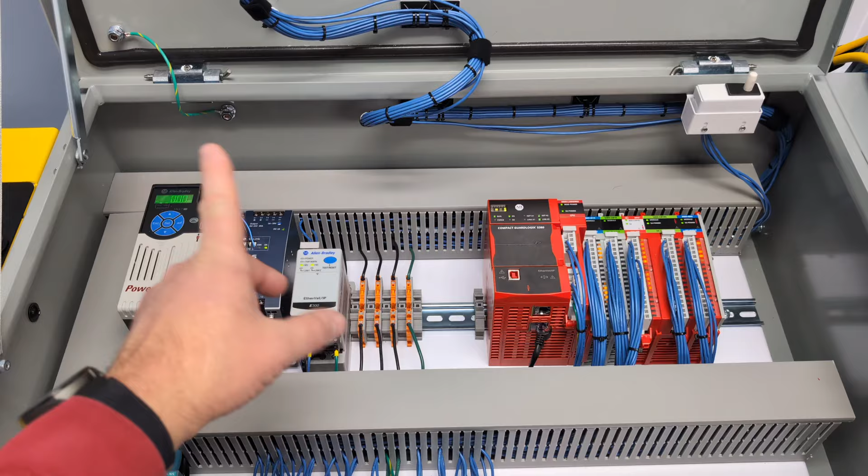So over on the Rogue rig, we've got it built out where the basic breaks work. The old one had 187 combinations that we consider common machine breaks. This one, we're up to about 60, and it should surpass it in the end.

What I want to do today is build out what diagnostics capabilities are built into these that we don't use. For example, your 5069 IB16s and OB16s have an incredible amount of diagnostics built right into them, and I have yet to see a single program that actually uses them to help us out. So I want to start mapping them out and identifying how we should put those in so they're also not nuisance trips.

Probably in the end, this might be an okay video series. Today's isn't going to be that polished - you're just going to see me fumble around and discover a lot of things we can do with these products.

For example, the PowerFlex 525 has that scattered read message, and we've done a video on it - I think we have, if we haven't, we should have. But also, I've fumbled into some really cool parameters in it. Has that video came out yet?

Yeah, because actually way over there, the motor starter trainer - I don't think it has come out yet, because I just released Saturday, I think, the video on how to wire a basic motor starter. But then while I was doing it, I recorded how to troubleshoot and measure a motor. And then we were like, well, what can we learn in this PowerFlex 525?

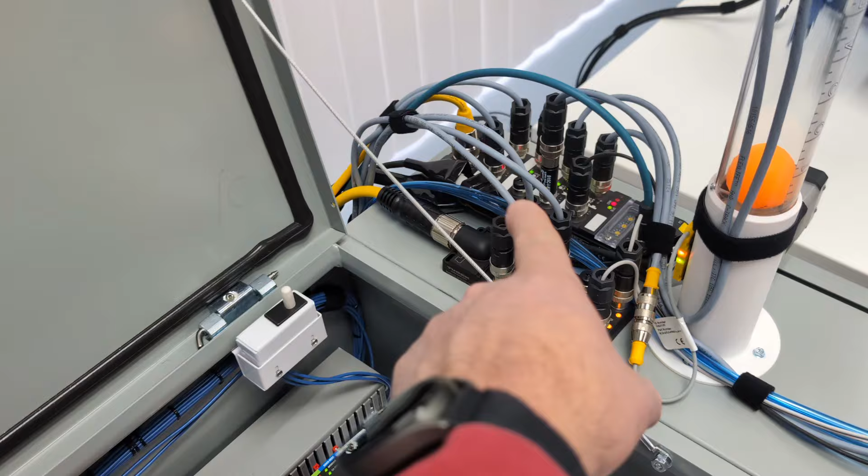But then the IO over there, we built out a series on the SCALANCE Ethernet switch, but it has a lot more diagnostics we hadn't even played with. And yeah, we got a motion controller here, and over here we got all these IO-Link thingamajiggers.

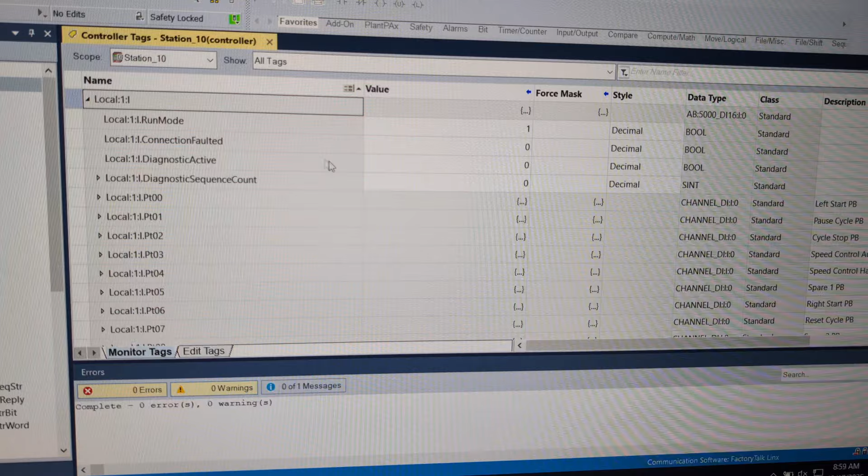So we go on into our controller tags, and we go down to local, and then local :1:I. Yeah, we got some really cool diagnostics here that I don't know that I have ever seen anyone use. So we have a sequence count, and I do want to play with it.

Because one, I want to figure out what are nuisance values on it too - are there times that we get an odd thing on it? But if you open up every one of them, they also do have a fault data, and they have an uncertain condition, and I need to do a little Googling on what exactly an uncertain condition is.

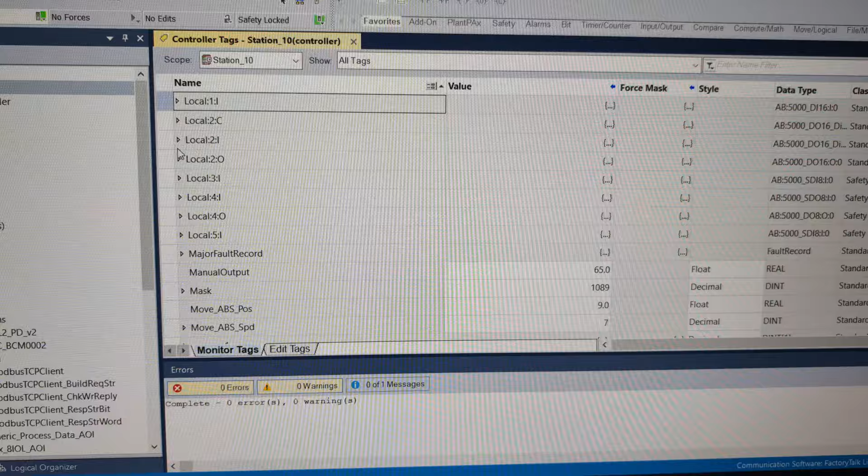But what I really see as useful, and usually when people see it they're like that's strange, is this is an output module, Local :2:O, that is this 5069 OB16. But we do have Local :2:I, and one, it has that sequence count, but every single output module has - and right now we're faulted.

Why are we faulted right now? Okay, well, there you go - I need to figure out why that is. But mainly we have a no load and we have a short circuit condition.

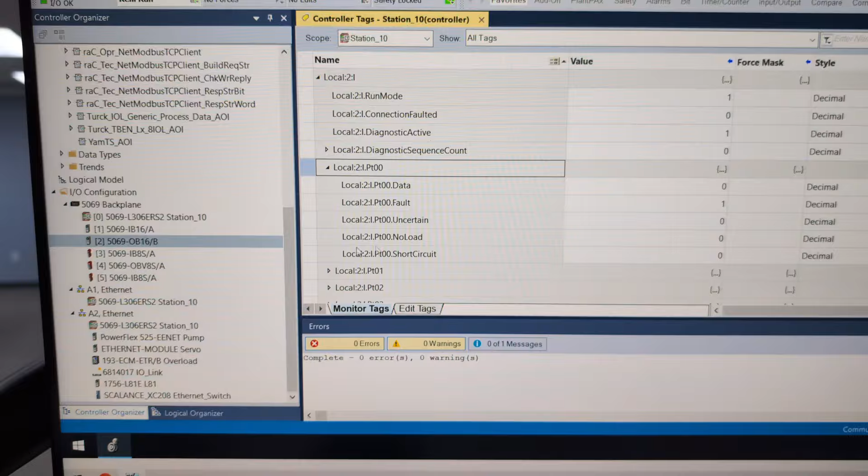And I do think you have to enable the no loads because I think they do cause some nuisance situations sometimes, and I'm not sure if you do or not. Now the question is, are we going to have that same module properties issue where I got to reboot this computer? There we go.

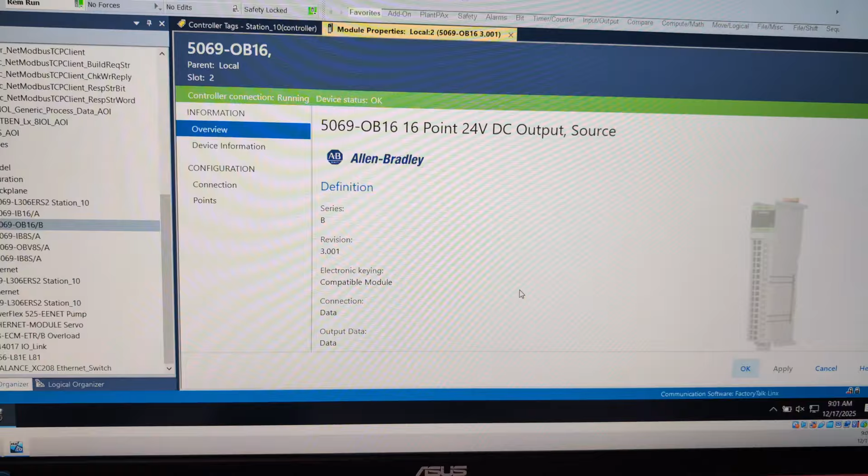Will somebody tell me what this adds to our experience? We added all this fancy graphic, and now I got to click 5 different places to find stuff. I really don't see where that helped anybody out.

But all right, we go to points, enable no load diagnostics. Well, the first thing we're going to do is, just because this is the way we do it, we're going to check that box. We're going to hit the apply button, and we're going to do it without inhibiting because this is a test situation.

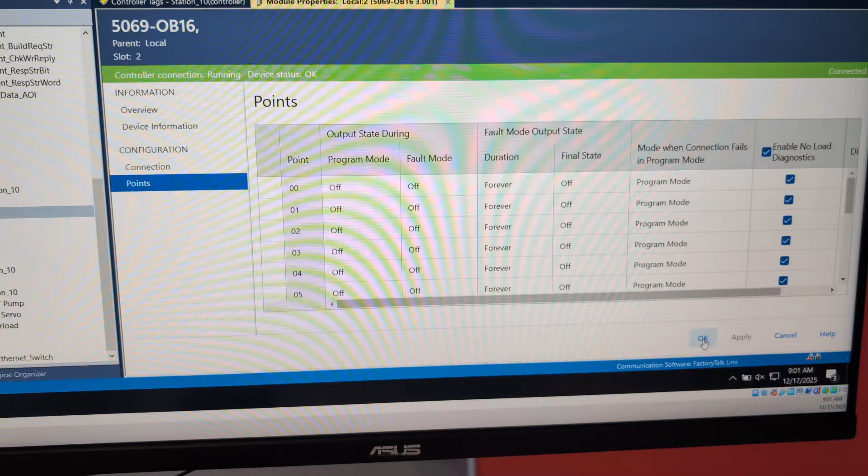And then I believe we're going to go hit the safety reset. And we have a very angry output module - yeah, we do need to figure out that one. Probably should have figured out that one first, but we're already on to this one. So I'm going to hit my safety reset.

Okay, so right away I see that was a really bad idea to check the boxes on all, because now I have lots of flashing thingies that I don't know why. So we do need to be selective apparently about the no load. I'm trying to figure this out. No, it's that they're off.

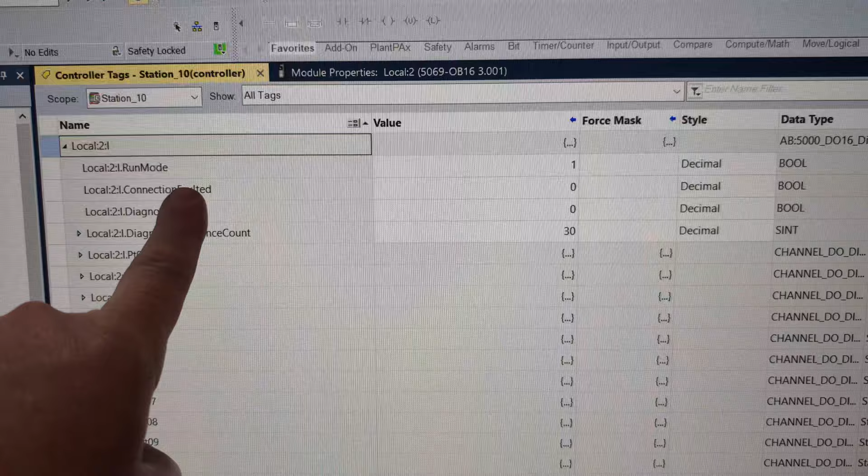So really, for any unused output, don't check the no load box. Got it, okay, so I unchecked all of the ones that weren't used.

And mainly, probably the first thing is this diagnostics active. We don't want it being a nuisance.

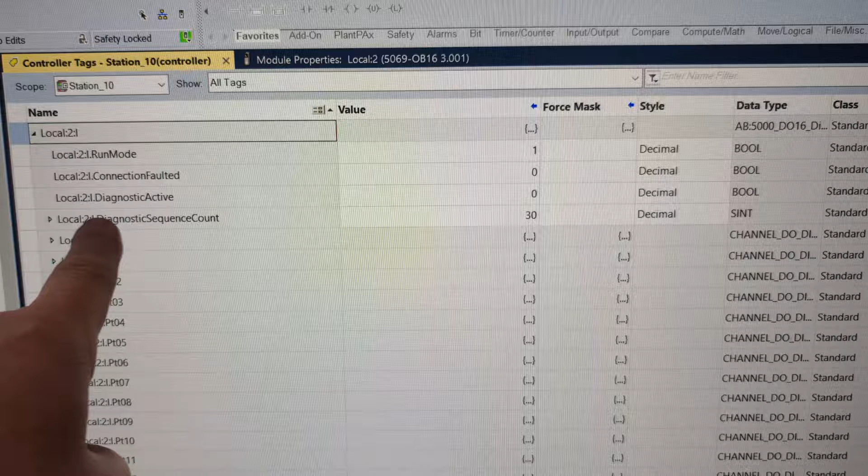So now what I'm gonna do, let's press the E-stop. Right now we have a 30, let's see what that does. And that indexed it by 16, because you have 16 outputs.

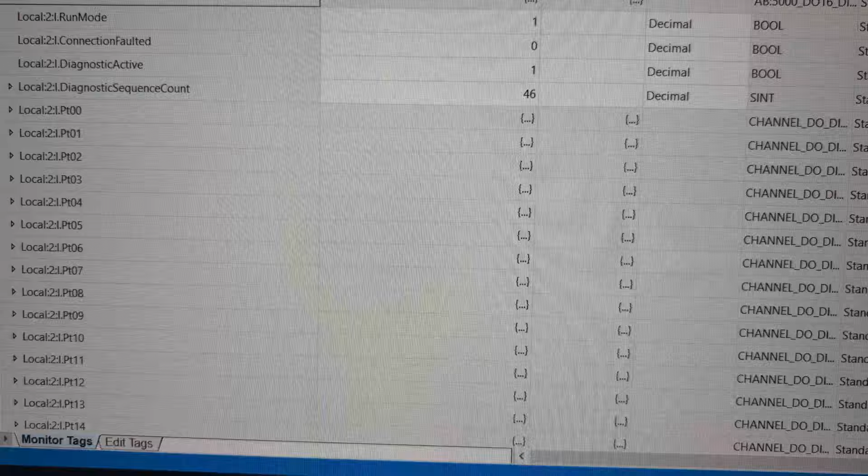All right, so in the end, I know that means I don't have field power, and I kind of feel that there would be a no field power here. Let's see, let's just go over here.

And let's see, each one of these has a little dot dot dot on it. Let me drag this over a little bit. Yeah, we got a little heartbeat thing on this one. We hit that.

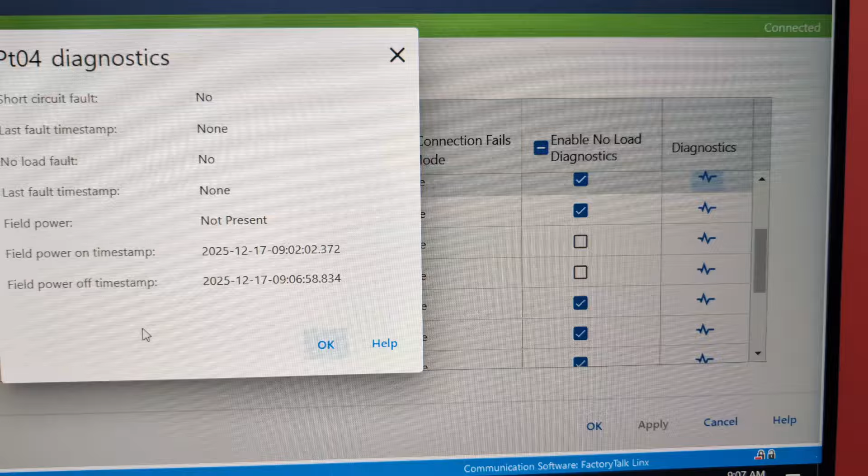Field power not present. So I feel, how are they doing that? Well, at an increment of 16, I guess they're saying if all 16 outputs have a fault.

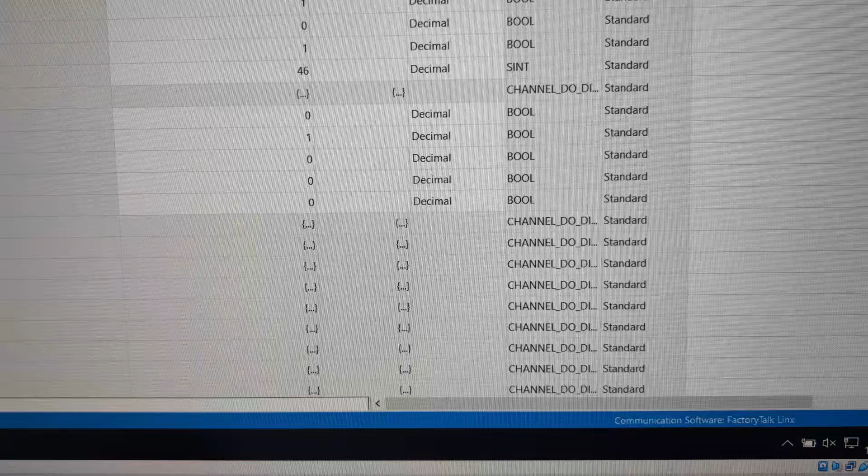Because yeah, you have a no load, you have a short circuit, and you have a general fault. I guess, whoops, you can't see where I'm at. You have a no load, short circuit, and then you have a general fault. And I guess that means field power not present.

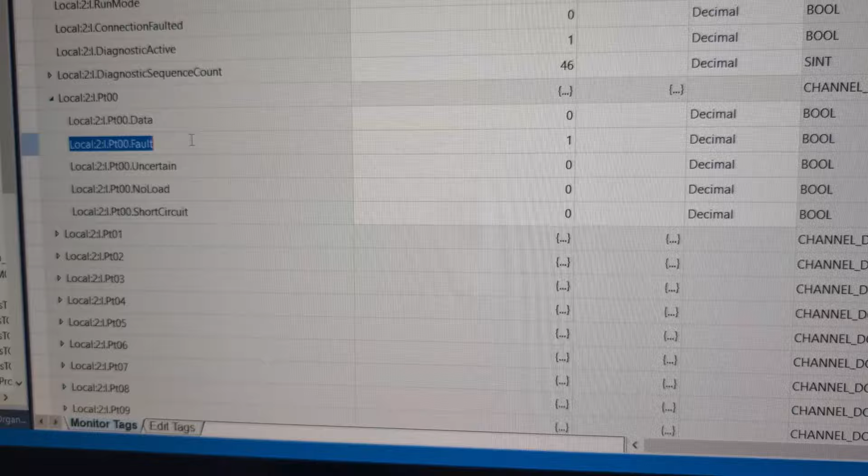So let's see if we can build out something for this. The first thing I think I want to do here is create a separate routine for this.

Actually, what am I going to do here? Yeah, and it's not that I'm trying to be dirty with this one, this is a troubleshooting program also. I think some of y'all have seen in the previous videos where we have different codes.

Just so they can understand that more than anything, that they need to be watching that someone's not doing it. So I'm actually going to add a diagnostics routine to this just for me to practice with, and I'm going to put it in this one.

So that way later on in the week we can show them that and see what other ways we could do diagnostics. So we're going to call this diagnostics. And I am going to do this one in ladder. That way, when they open it up, we could talk about it.

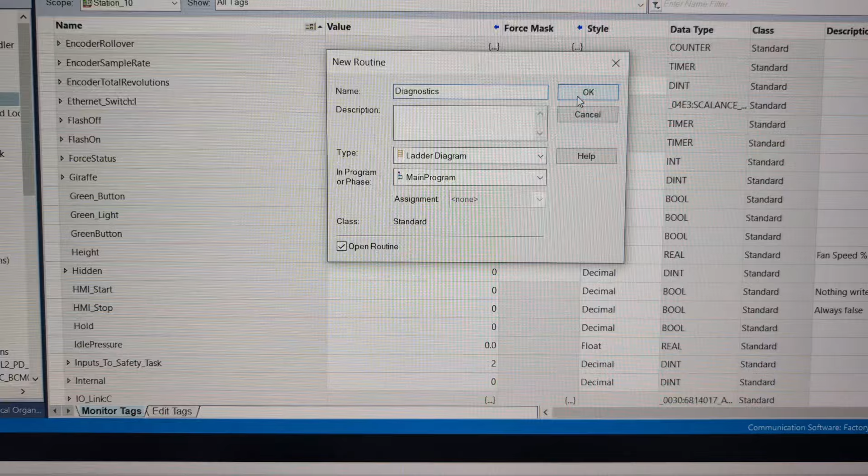I had a previous one in here, and it was done in structured text, and I didn't even have it source protected. And that seemed to prevent anyone from ever opening it.

But okay, so really, it looked like if I had a 1 in all of these, that means I probably have a problem with field power.

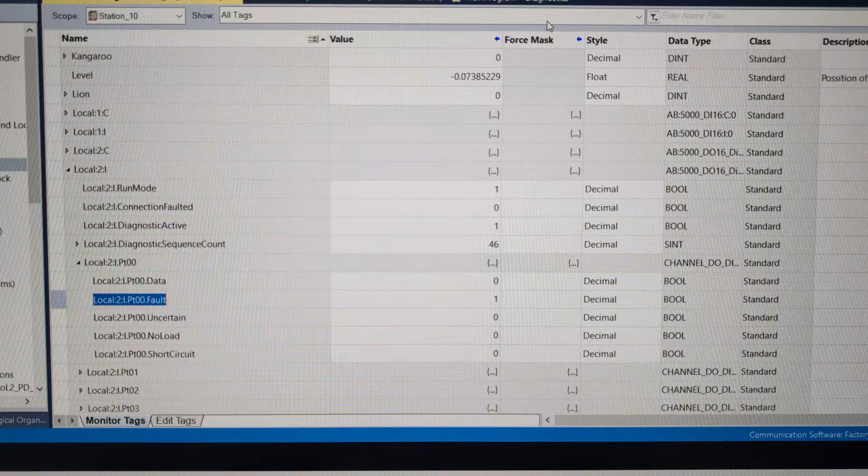So we're going to start off with just a look for a 1. And we're going to look for a 1 there. And I'm going to copy and paste that 15 times.

And the next question is, what do we do with this? And a lot of you have asked for me to do videos on the alarms, the digital alarm and the analog alarm. And I've played with these, and I can be honest, I wasn't really excited about them.

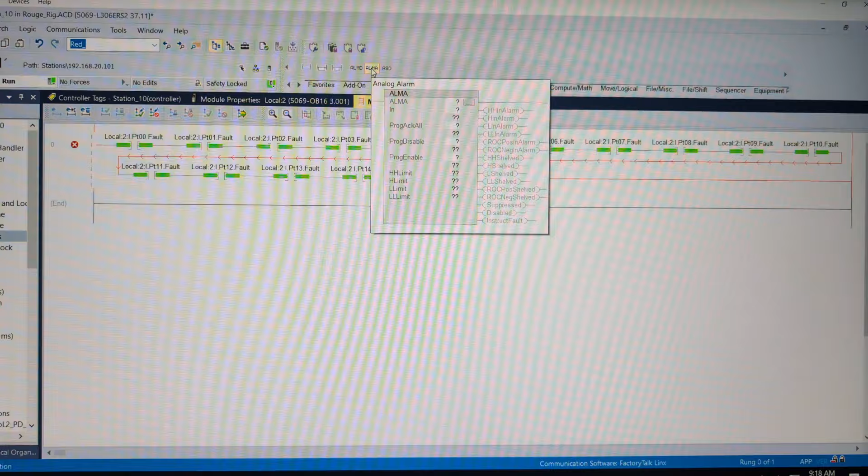So I don't think I would do that in the field. I don't see these being used a lot. And even when I do see these being used, you can tell they're just using it because it was the thing that they ran into first and they thought it was neat.

I think I would go old school here, and I would bring an output energized down, and we're going to make a tag called, I don't know, how about alarms and warnings? That kind of makes sense, doesn't it?

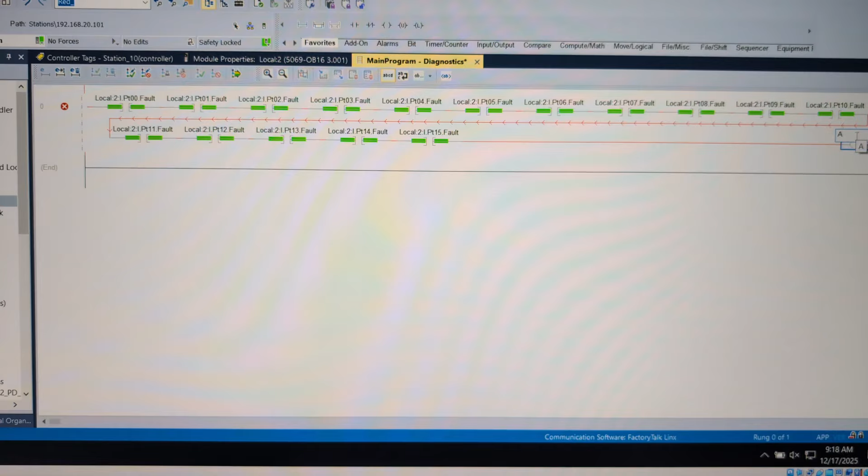So I'll say alarms and warnings. And then we can kind of triage a little bit even here, but probably we'll build this out into an Ignition system. And this will be interesting.

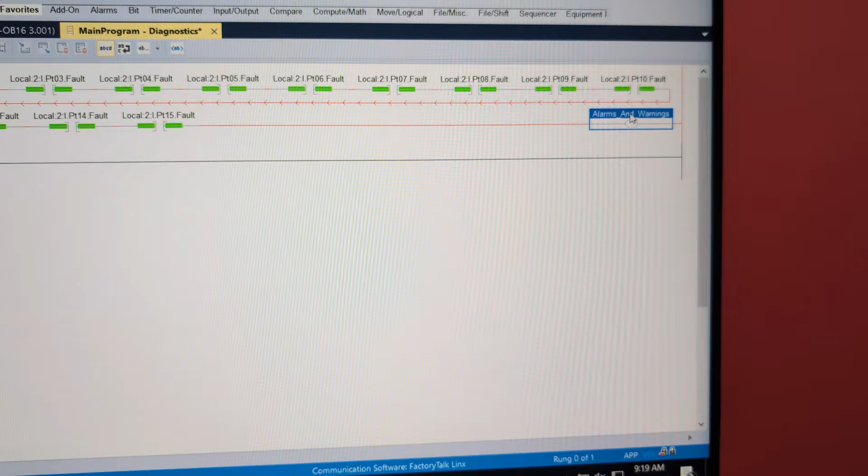I really got to think about this because I would never lock this down normally, but we have an opportunity here. But for now, all this is going to be open because I don't have class until January. I can always just take this routine out for now.

But honestly, I would probably just make a DINT. And for now, I'm going to make it with, what am I going to make it even? I'm going to make it a dim 0 of 10, which there's a shortcut way you can do it.

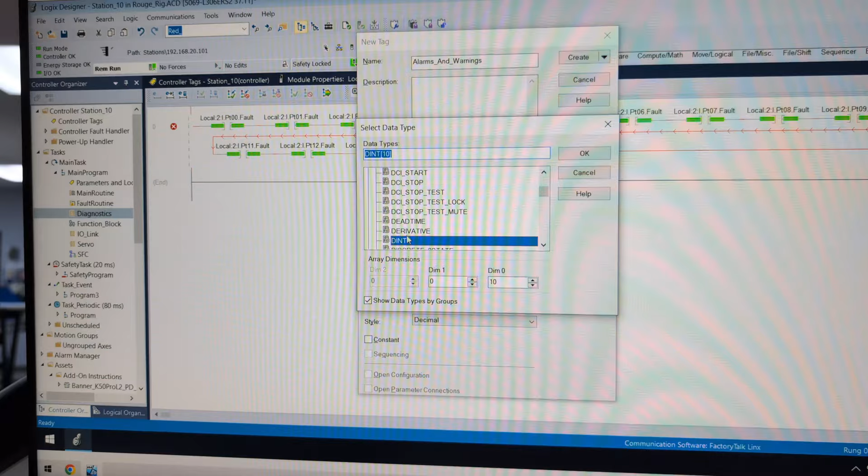I'm going to just, dim 0, 10 and create. And then we're going to go in here.

Oops, didn't mean to do that. Control Z. Then we're going to double click into that. We're going to hit our arrow here. Alarms and warnings.

Yeah really, that gives me 320 alarms. I'd be curious to know your thoughts on that. What do y'all think about that alarm instruction? I kind of see it as a little obscure compared to some basic seal-ins and alarm resets. It gives you the acknowledge and everything, but I guess traditionally I see that done in a SCADA system. So I don't know, we're going to build this out and find out.

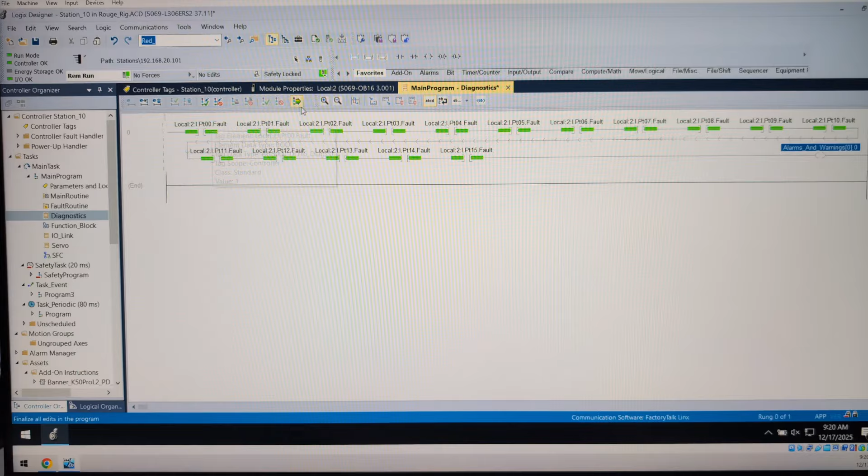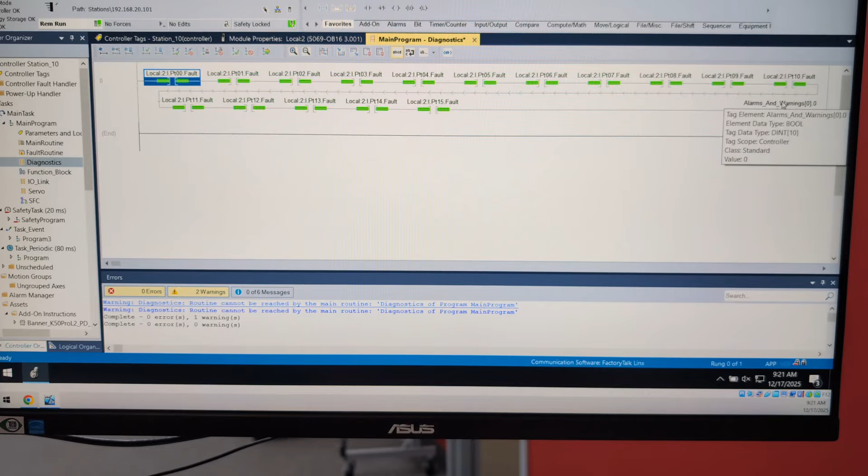And of course, we'll go ahead and highlight this because y'all do it all the time, and I do it half the time, even though it is on my mind right now, is I hit the finalize button. Yeah, I know we have a warning down there, but you're going to have 2,000 warnings and you're never going to pay attention to them on your machines, as this is all true across here. Yet this has a 0 in it over here. And here's where I stress, look for those green bars.

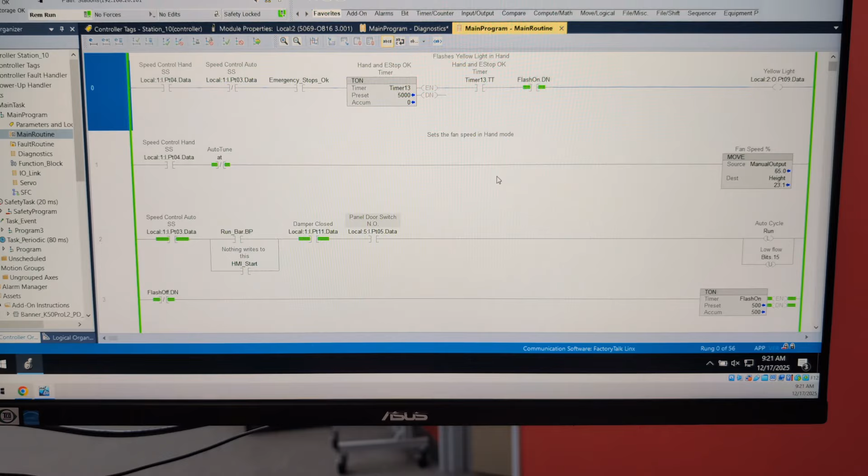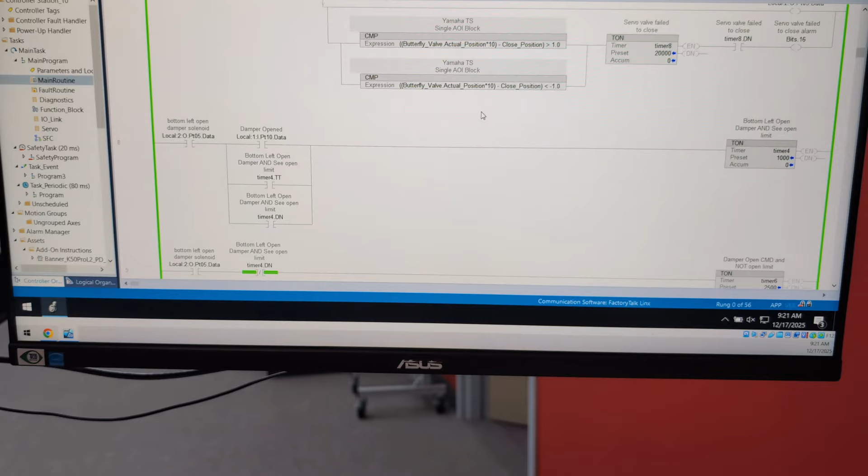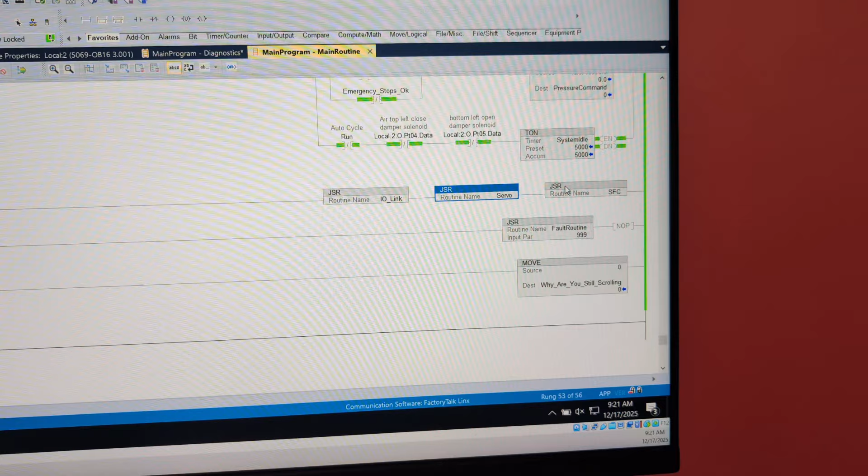Before this will even run, we need to go to the main routine and we need to add a JSR. Now, a lot of you are going to look at this and be like, Tim, why are your JSRs not at the top? This program is based off a group that wrote this, and it kind of goes through the evolution of how they wrote their program. They got way down to here, and then all of a sudden they're like, oh, we should have some of this divided up. Right down around here, you can see where they realized they needed a PID, so they added a function block there, and added some more features. Then they finally came on down here somewhere, I forget where. Then all of a sudden they started realizing they needed to break their stuff up, and they did that. So I'm going to do the exact same thing.

We're just going to copy and paste this JSR. Oops, so we're not going to do that. We're going to do this one. And we're going to go and put in diagnostics. My semi-OCD is going to say that I want to put these in alphabetical order, even though in this case it probably won't matter. We'll finalize that.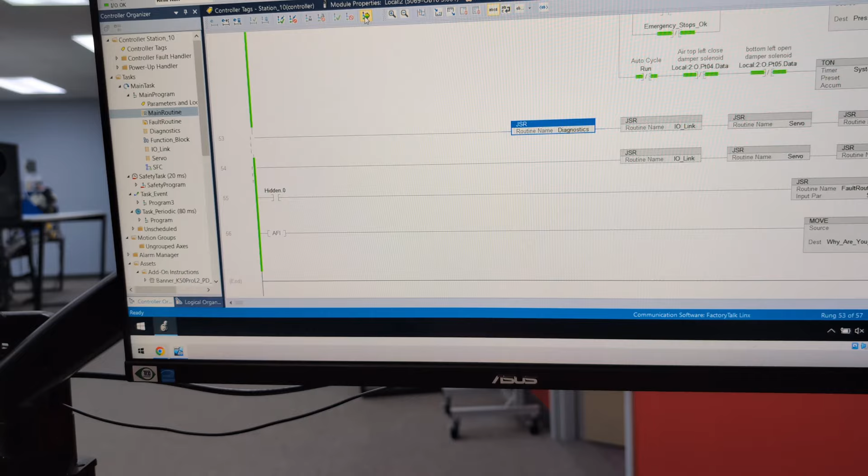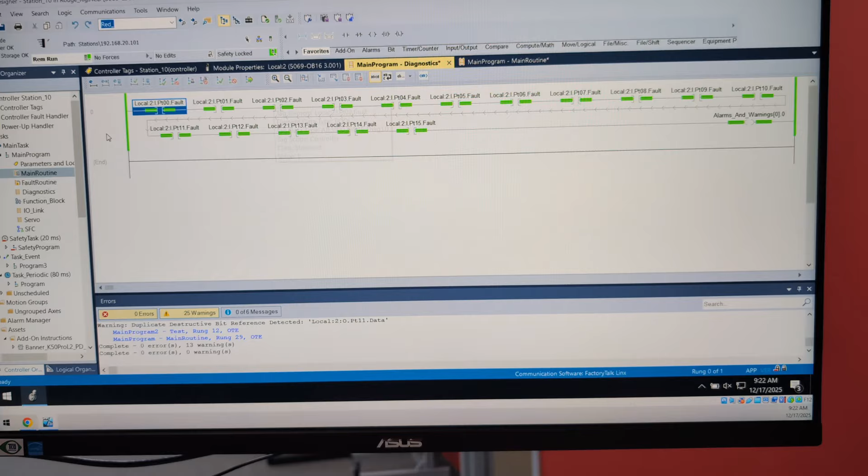And then we have our first alarm and warning. Now along with this alarm and warning, here's where, you know, I wish y'all would test your alarms and warnings more, the next alarm we really need, which we have right now, is the e-stop pressed. So over here in our safety task, we do have, where is it? Right there. And right now we're looking, we need a 1 in this 01. That's our safety. So if we don't have that, then we have a problem.

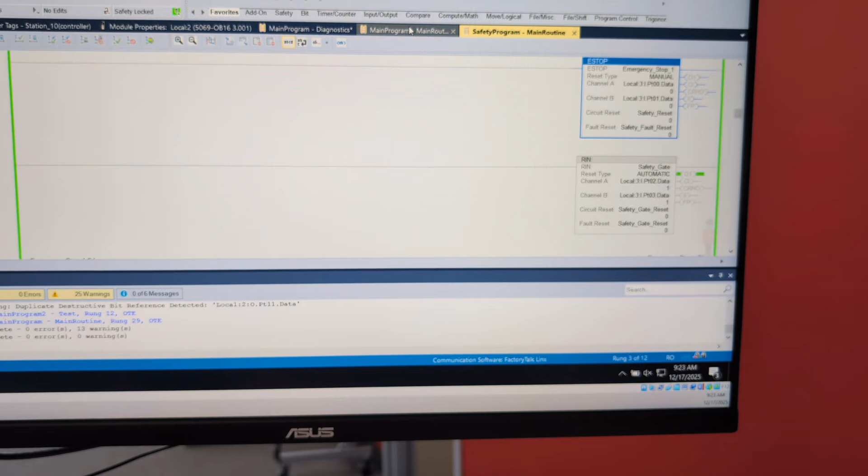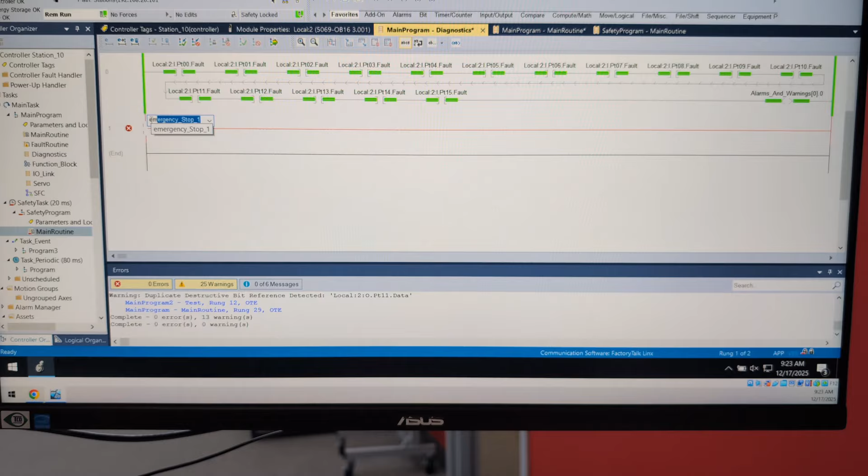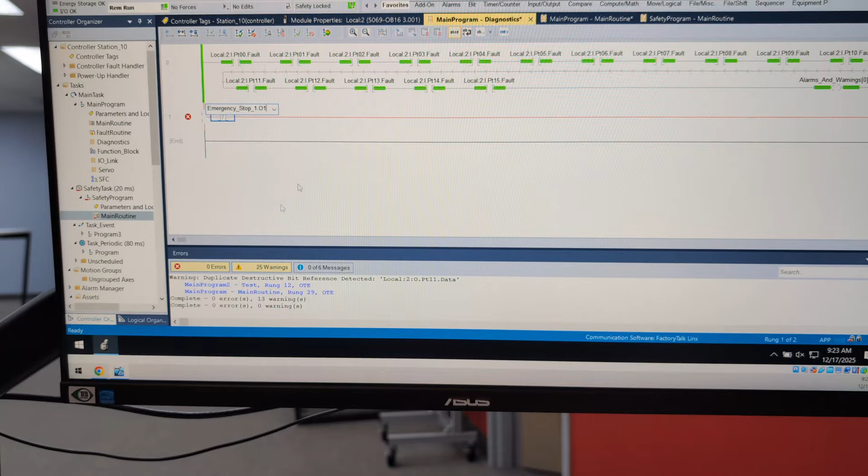So I go over here and we bring a new rung down and we're looking for a 0 at, I think it's called emergency, nope, it's called e-stop. It's not called EM stop, it's called ESTOP. Well, here you go, follow your arrows. It's called emergency stop 1, 01. We look for a 0, and that's going to be our second alarm. And we'll finalize that one.

Yes, I know we need to put some descriptions on these. But I want to get to this point right here: now when we press our e-stop, we have 2 alarms. That's not good, because if an operator, or even a level 1 technician, goes to an HMI and they see 15 alarms, they're going to call and say, hey, I need a programmer, something's got scrambled in the PLC. So we kind of need to triage our alarms.

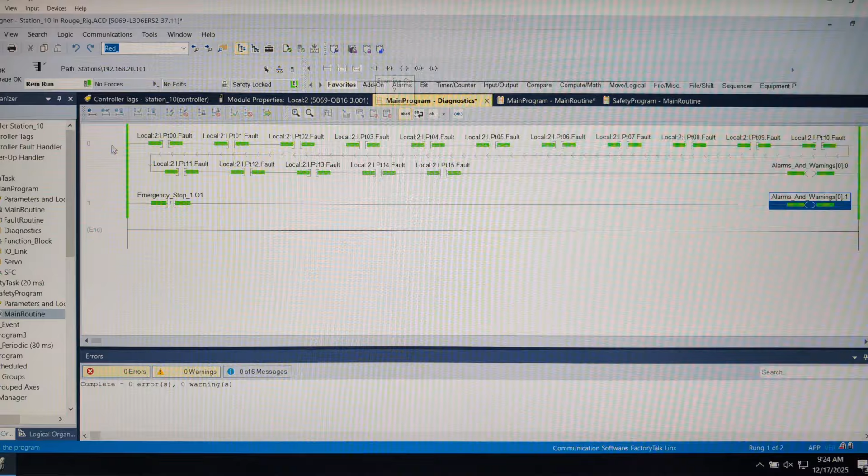So if our e-stop's pressed, we're not going to have any field power. So we don't need that field power alarm. So now we're going to go and start a rung edit on rung 0. And we're going to go look for a 1 down, and we want to look for a 1 at that e-stop OK. And finalize that.

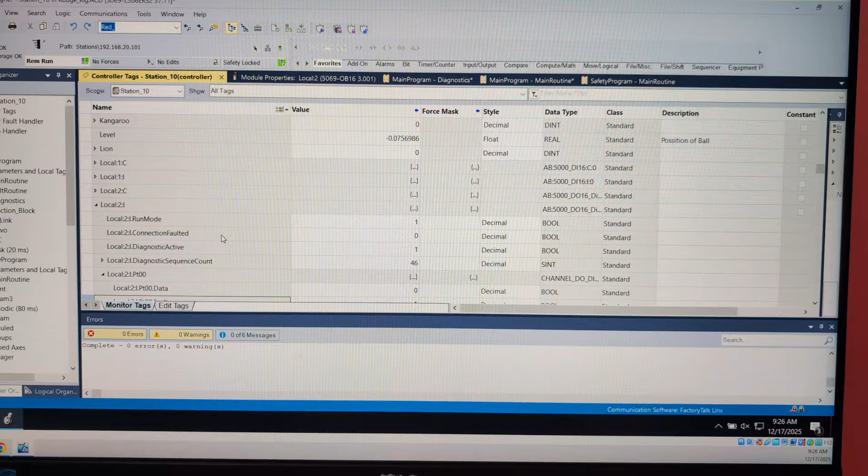And now we get that first one off. Let me throw a couple descriptions here. So the next thing really was, I think on each one of them, would be the open circuit, or the no load and the short circuit. I'm not sure what a fault condition would be if you don't have a no load or an open circuit, but for now I'm going to add the no load and the short circuit for each one of them.

Yeah, I did say each one of them. That's something that probably comes up a lot in our advanced class - we go through, this will be the first trial going through the Rogue rig. We went through the unfamiliar machine before, and you didn't just have to simulate the breaks and figure out what was wrong, you had to figure out how to discover it in ladder with the devices you had, an alarm. And a lot of them were like, well, couldn't we group all of those alarms together? And I'm like, okay, but why?

Electrons are cheap. Let's go ahead and make an alarm for each single output, that way we know it. And even then, I wouldn't group the output one and output, or the open load and the no load - open load, no load, that's the same thing, open load and short circuit - I wouldn't group those together. I mean, I would have it individually. Now, when we walk up to that HMI or SCADA system, we know with almost 90% certainty what we need to go grab.

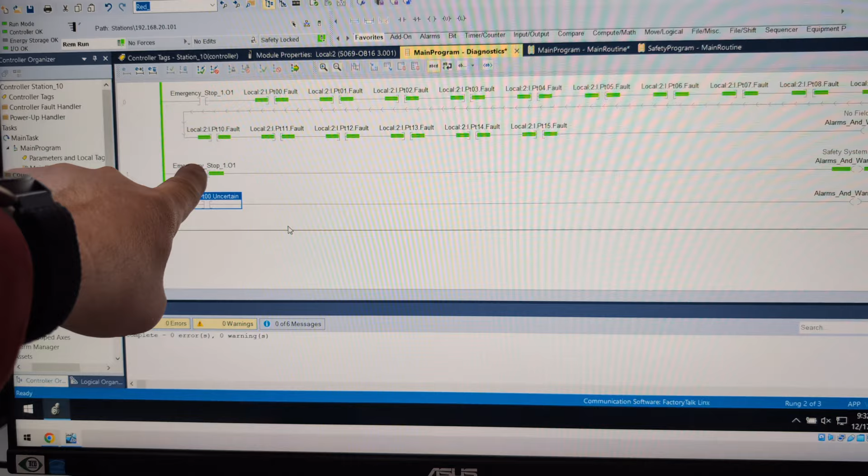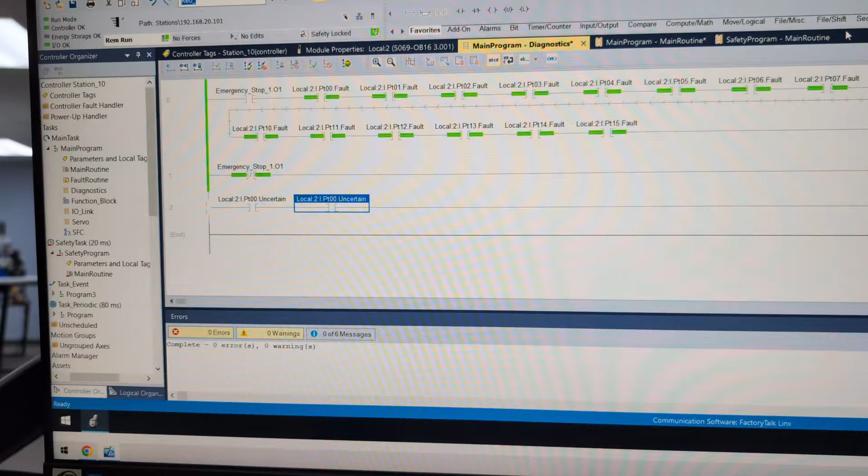Now, very similarly to that, we didn't want that e-stop, or we didn't want our field power alarm if we didn't have an e-stop. I don't think we want any of these alarms if we don't have field power. So I kind of feel like - oops, I didn't want to drag. Yeah, well, actually, copy and paste this, and then we drag that over there. So we want to look for a 0 right there.

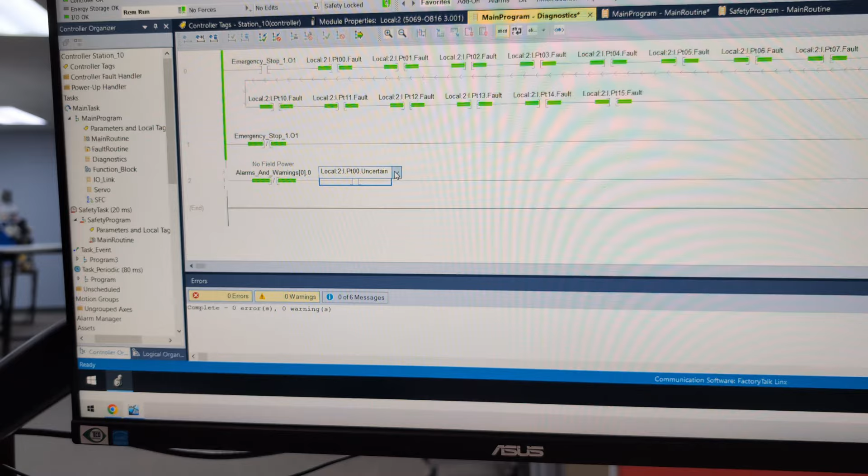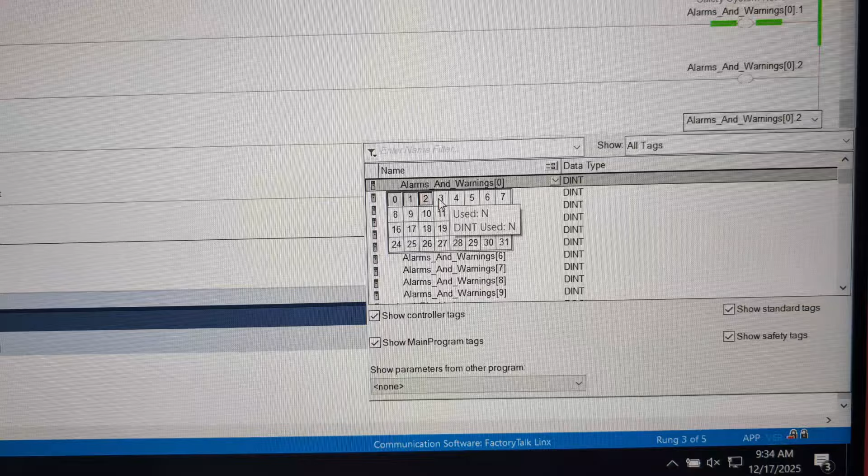And then, I don't know what uncertain means yet, but we probably should alarm for uncertain. So I'm going to drop in uncertain, no load, and short circuit as individual alarms. A lot of people get fixated trying to make this bit line up with over here - I'm not going to do any of that, because really in the end we're going to drop all this into Ignition and do our alarming over there. Also, while we're at it, a lot of people don't realize that when these boxes are gray, that means they have been used, so as you're going along you can just grab the next white one, and I'm just going to keep doing that all the way down.

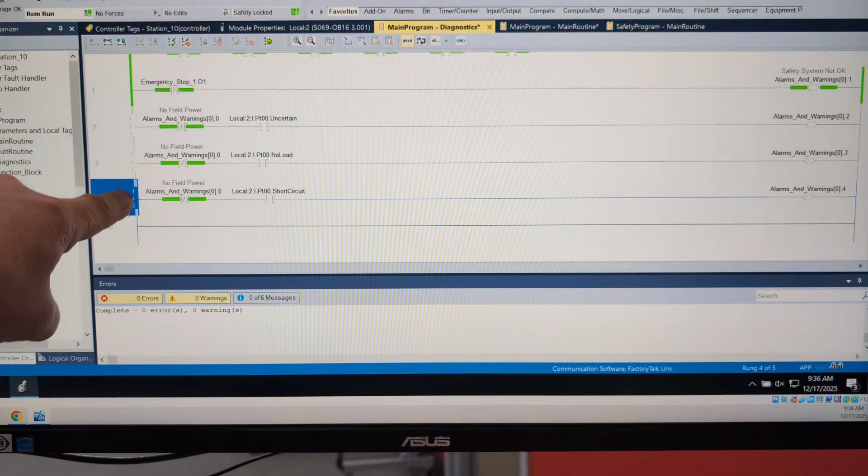Now, I could highlight these 3 rungs and copy and paste them 15 times - 15 times 3 is 45, that would give me 45 places I've got to modify, mainly this all the way down. I already got to modify this already. I might be able to work some magic on it as well, but I'm not going to do that. I am going to highlight these 3 rungs, and we're just going to copy them.

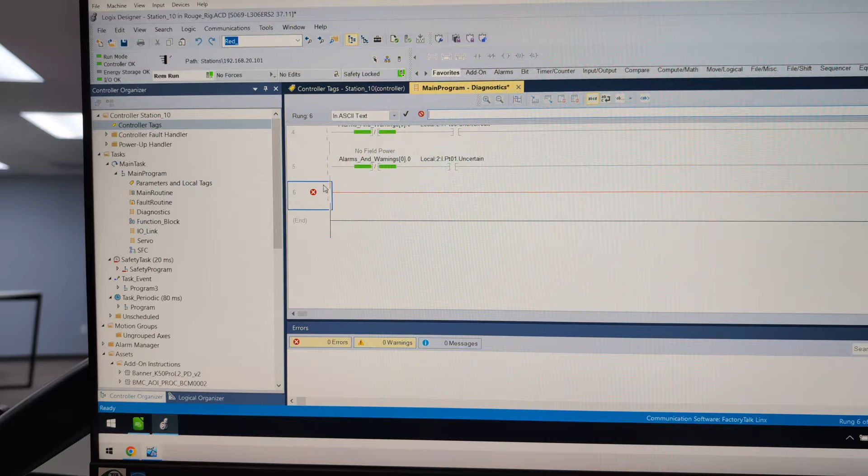You think you want to right click and paste, but you can't - we got to add a new rung in. We add a new rung, and then we can double click on that rung. And I'm going to show you, because you're going to get really super discouraged here, is you're going to try to paste this in, and you're going to hit that enter key, and oh no, we end up with all this crazy unknown stuff.

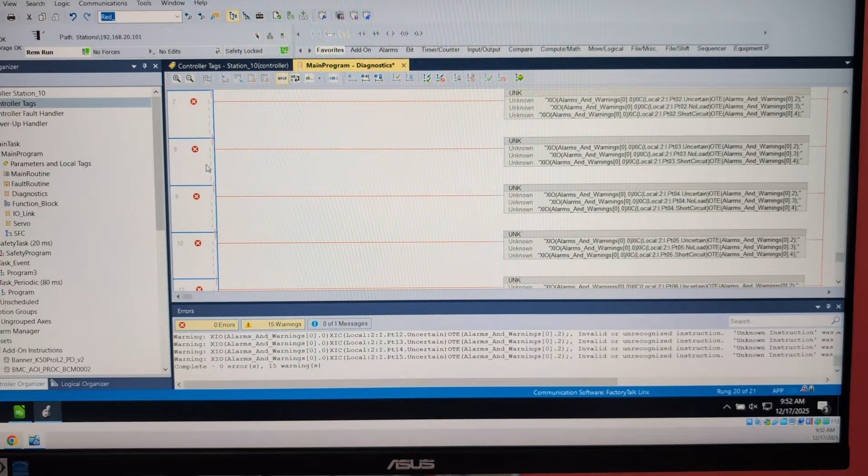Now we're going to hit that undo button though, and we're going to do it again. Whoops, let me get that one out of there. We're going to do it again. And a lot of people don't pay attention to this little ASCII texting majigger right here, but if we take that and we make it neutral text, and we paste it in, and then it thinks a little bit.

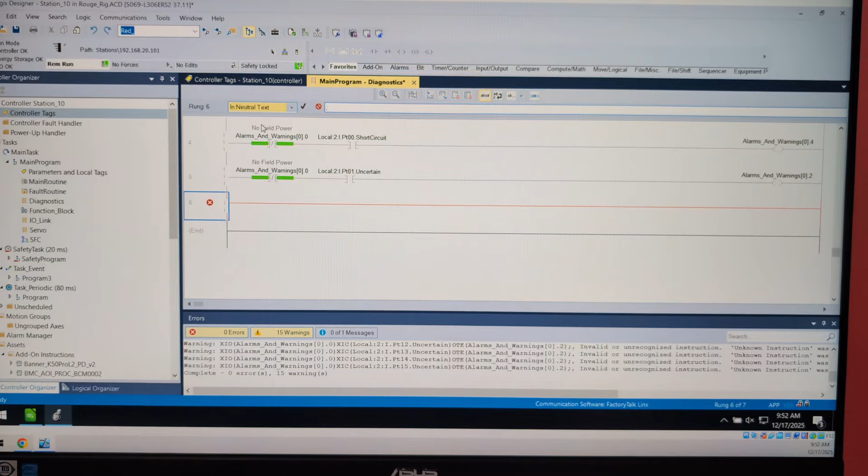Come on, don't let me down. Uh-oh, is it letting me down? Or is it thinking really hard? Or did I crash the computer? Here's one of those times it's like, do we patiently wait on this, or did I just totally screw up? Oh, there it goes - it was just thinking really hard. And yeah, we just pasted 50-some rungs in with one little simple Excel thingy.

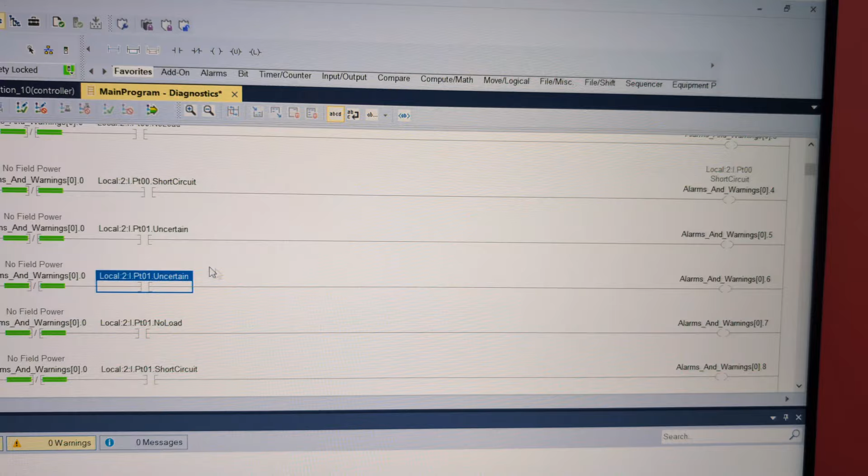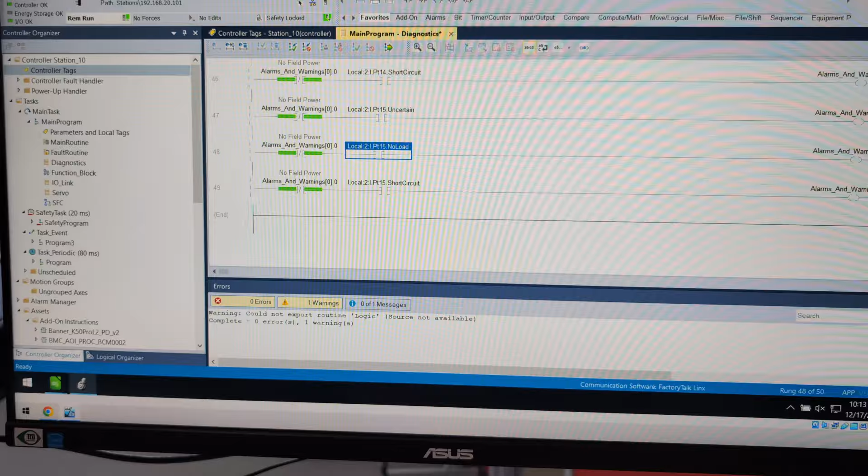Now, very similarly, I don't want to have to put this in every single one of them, so we're going to go up here to Tools, Export, Tags and Logic Comments, and that should be good enough. I'm just going to stick this over here somewhere. Then we'll do some fancy spreadsheet thingamajiggers again, and we'll go over here to Communications - oops, not Communications, I'm so used to going there - Import, Tags and Logic Comments, and we'll go back to that same little spot.

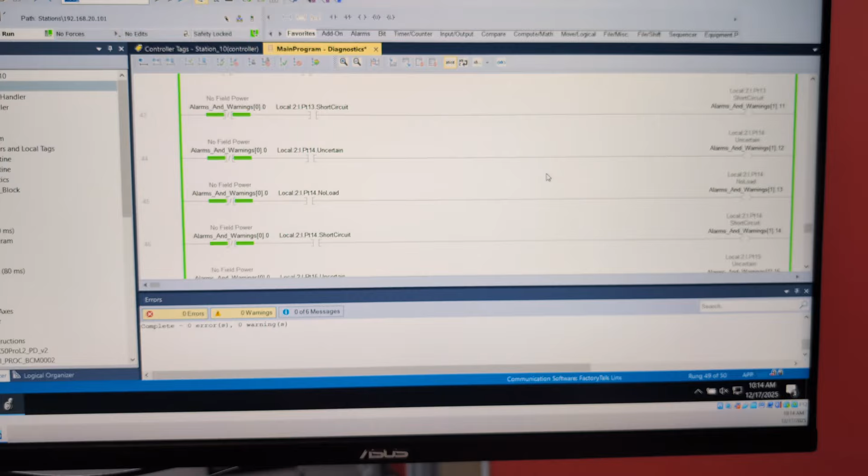Grab those tags and let it sit there and think a little bit. And there you go, now we got all our descriptions in. Hopefully I lined them up right. That would be a miracle. I did, woohoo! Now y'all know how much I do love y'all scrolling up and down through the program trying to figure out if you have an issue.

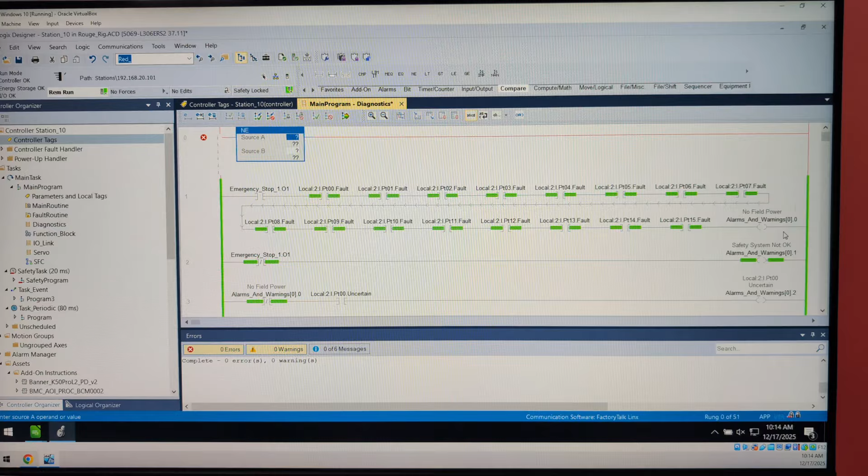So now I'm going to add a rung, and actually I'm going to add this one to the top because this would be what I want to see first. I'm going to put an NEQ instruction, so we're going to do the compare tab - it's an NE instruction - and we're going to look at the smart alarms and warnings. I'll backspace out that .0, we're just going to look at that. If it's not equal to 0, and then we're going to put an OR, because we are using 1 now. We'll put that in there.

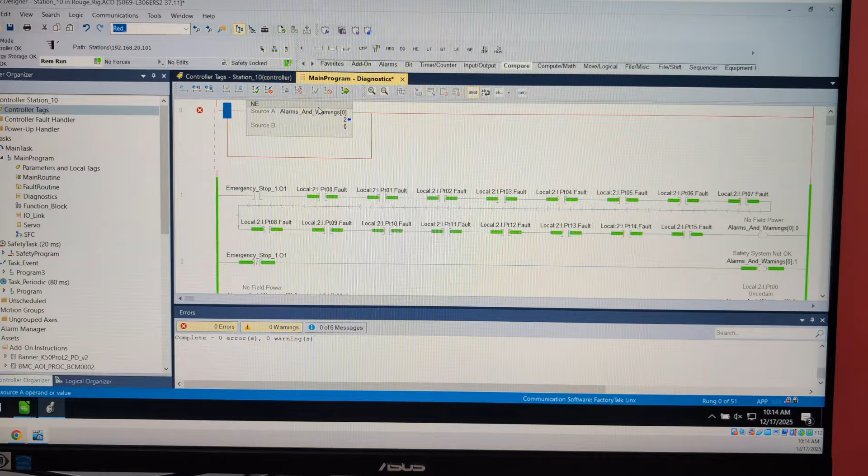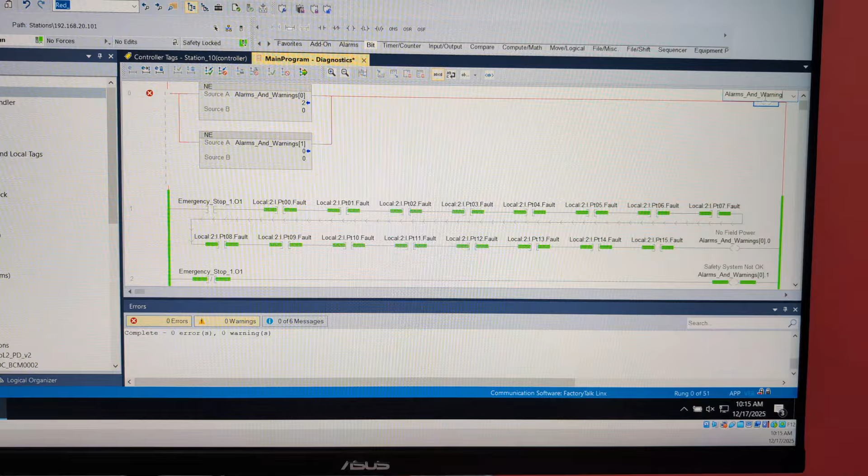We'll go ahead and just, for now, grab a bit here. I'm not exactly sure how or if I'm going to integrate this into the actual training rig, but I'm going to put alarm or warning present, that's what it should be. Just that way I can look here and figure out when I'm getting a nuisance alarm, which right now we do have an alarm because my emergency stop is pressed.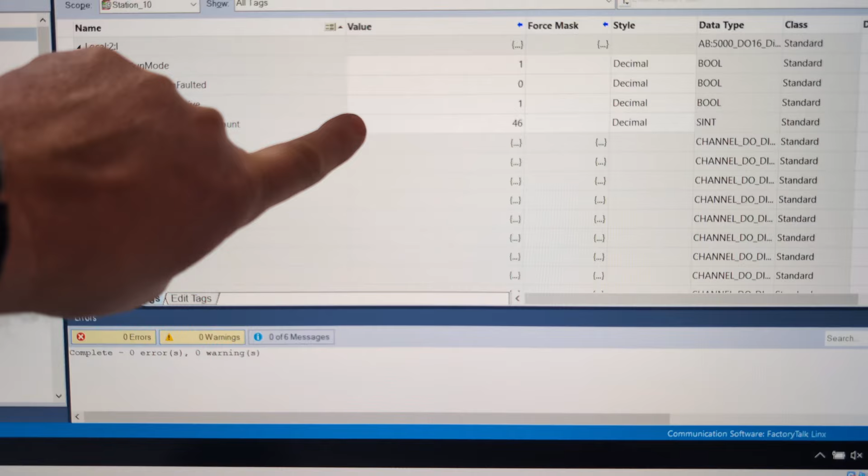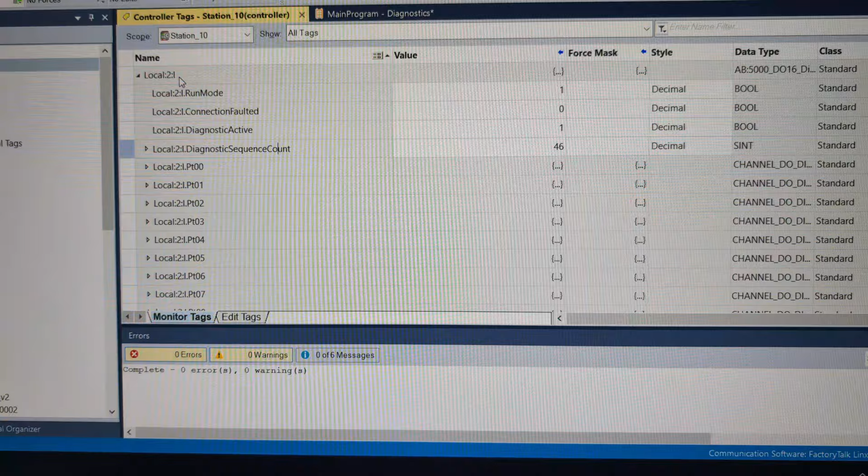But okay, thinking back, I think that probably would be a good start on the inputs. Now, the one that I am seeing on the outputs that I'm still kind of fixated on is right here, this sequence count number. I don't know what to do with it yet, but it's probably not an alarm that it changes - this is something we should be logging in the background. Because if all of a sudden we think things are going normal and this goes from 46 to 460, that would give us a lot of info compared if it went from 46 to 47. So I'm not sure long-term what the best thing to do there is. And also, I'm not really 100% sure.

Well, why wouldn't we do the fault on these? I'm not even sure how you get a fault on one of the inputs. I guess I need to learn how we would get a fault on an input. So yeah, I'm gonna go ahead and do the same thing with my faults now, my input faults.

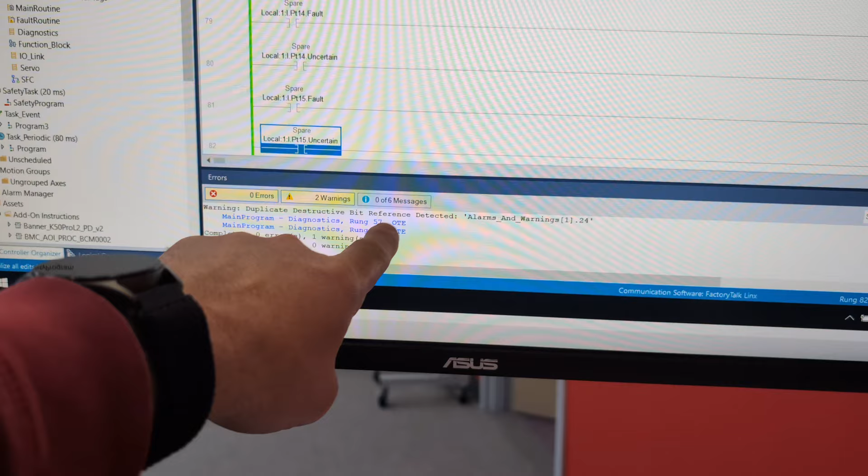I ended up with a nice unplanned learning opportunity in this last one, and this actually is gonna be a really good example of don't get too OCD about lining your order numbers up - lining your bit faults up. Looks like in my copy and paste I did something wrong on rung 57 and 58.

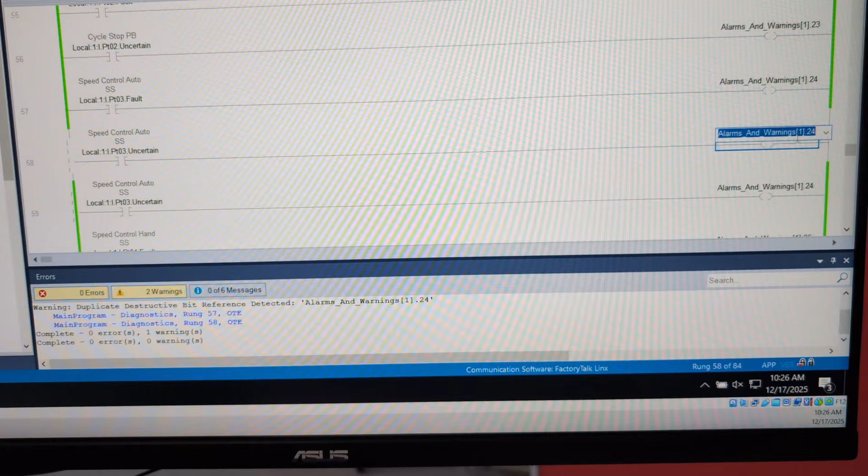So we go up here and I put in 24 twice. Oh okay, this one's not a big deal, I skipped over 25. So we start a rung edit here, we hit that dropdown, we hit that, and sure enough 25 is not used right now. So it wasn't as great of an unplanned learning opportunity, but I guarantee you I'll screw up by the end of this, that way y'all can see what I was thinking.

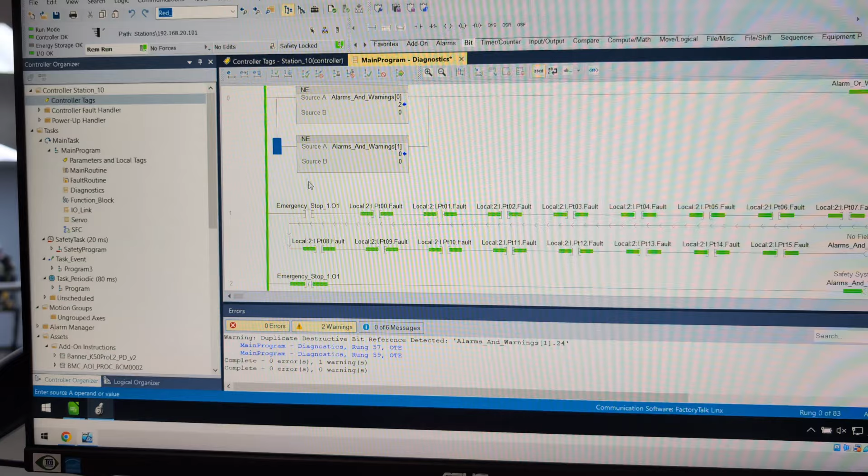And so yeah, that takes care of that. Now, one thing - when I was spilling down doing this one, I spilled over into 2. So I didn't think enough into the future up here on this. I need to go ahead and put all of these in. I am going to build, it's going to be a lot of alarms. Now one thing I want to make sure of as I'm doing this, and really this can be good later on diagnostics, but I want to make sure we're not getting nuisance trips, kind of similar to that sequence count.

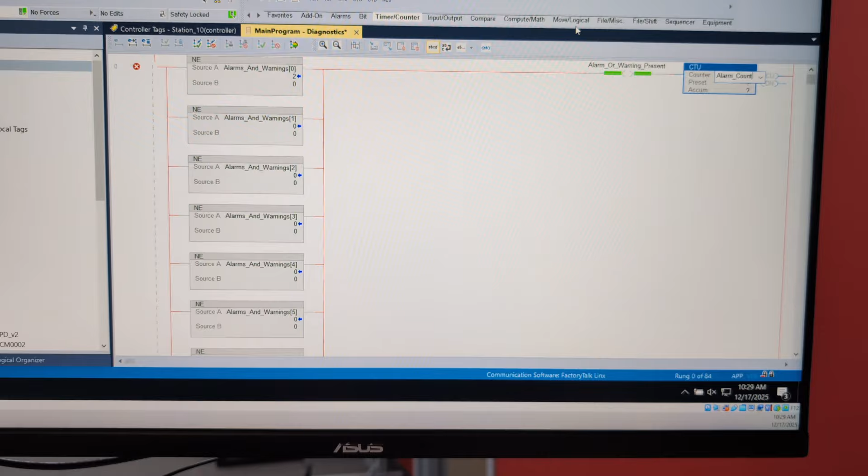I'm going to put an alarm counter in here, just so that we know that all of a sudden if I do something over there, we don't get 15 alarms or something. So I'm just going to put alarm count, and we'll go ahead and create it. And here's a good example - I'm not even going to put a preset on this one because I just want to see if that value jumps up a crazy amount.

Don't get me wrong, I like Ignition. We're having Ignition training in January. But your machine, your PLC, will long outlast the SCADA system that's on it. There will be something new, and whoever rewrites it will never put the diagnostics in.

Plus, usually we start in the ladder. It'd be great if we could see it over there. You know, it's kind of funny.

Rockwell announced this week, I think, that the PLC 5 software, RSLogix 5, they're finally obsoleting. And people are up in arms about that. First of all, how long have they supported that since it's been discontinued? A boatload of time. But yeah, there are tons of PLC 5s out there.

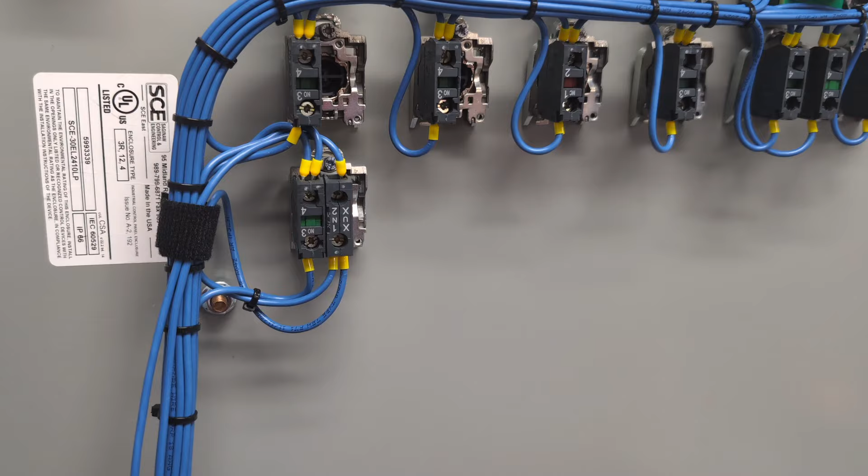I just want to make sure I'm not getting some crazy nuisance alarm, so I'm going to pull the e-stop out, and then hit my safety reset, which makes everything happy. I should not have got a count on that, and I didn't—I had a count of 1 when I walked away. Now I'm going to press the e-stop, and hopefully that only goes up to a 2. I pressed my e-stop, and my count went up to a 2, so we're good there.

That was on our basic inputs and outputs. I'm going to short circuit some stuff and take some loads off to simulate a relay coil burning up and test that. But we've already discovered an incredibly difficult learning opportunity, and apparently this happens a lot, on the safety module. I want to dig into that, because once you get it angry, it's hard to get it unangry, and Studio doesn't clearly show you what's going on.

We're going to go down into our I/O configuration, and I'm going to start on this output module. Similar to up here, the diagnostics on the outputs, I think, would take priority over the inputs.